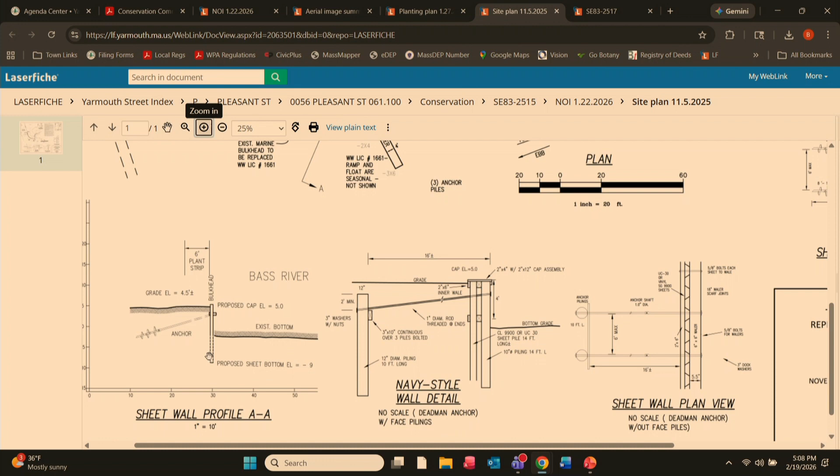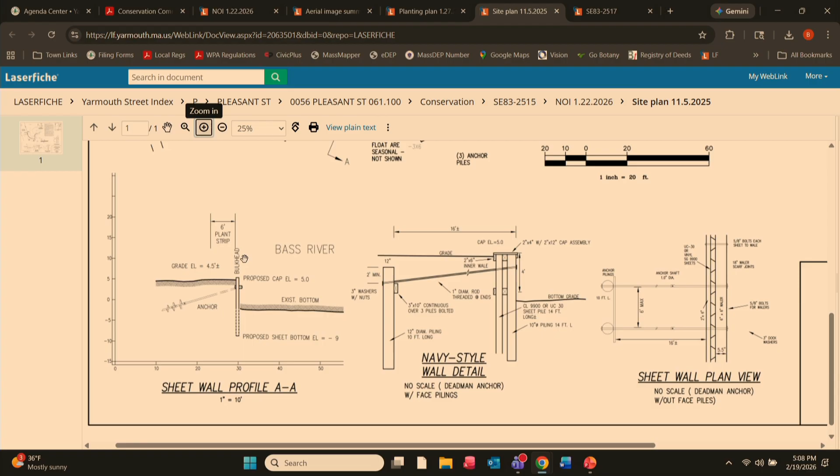Very traditional approach: the old material would be removed from the site completely. When these things are done, they basically pull back the material and extract the old materials in segments, so effectively what you have at that point, for a very temporary period, is a beach. The new materials go in, get fixed in place, bolted, and the fill goes in as we go, with the final amount of fill at the end.

The planting is beach grass with a smattering of Virginia rose or Carolina rose. I know I had Virginia on here, but the preferences are quite similar, and they're both considered native.

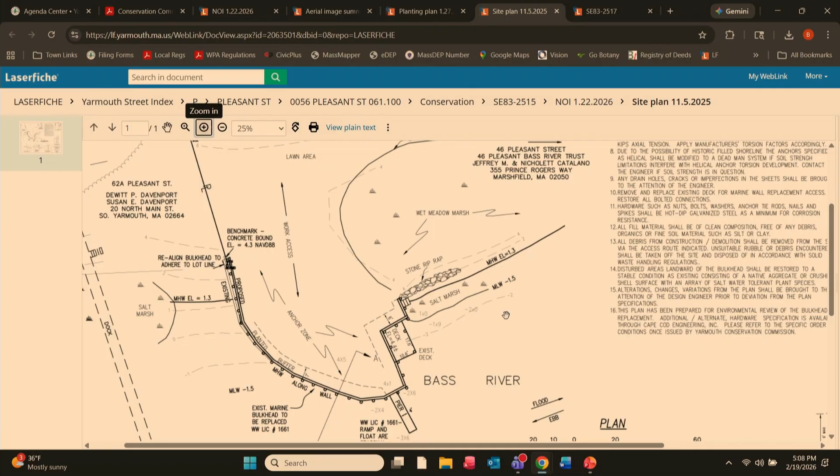The grass area for access is a turf lawn, so I could imagine that would be dented if it's not matted, and that would just be top dressed with topsoil and reseeded. I don't know, they might resod it, but I don't think there'd be any need to do that.

I don't recall whether we had anything serious from DMF. I don't think we had much feedback except that they received the project. It's at the boundary of the tide boundary here.

So I'd say this job might take 2 weeks by a good marine crew, and no surprises that I could see ahead, but I'd be happy to answer your questions. Thank you.

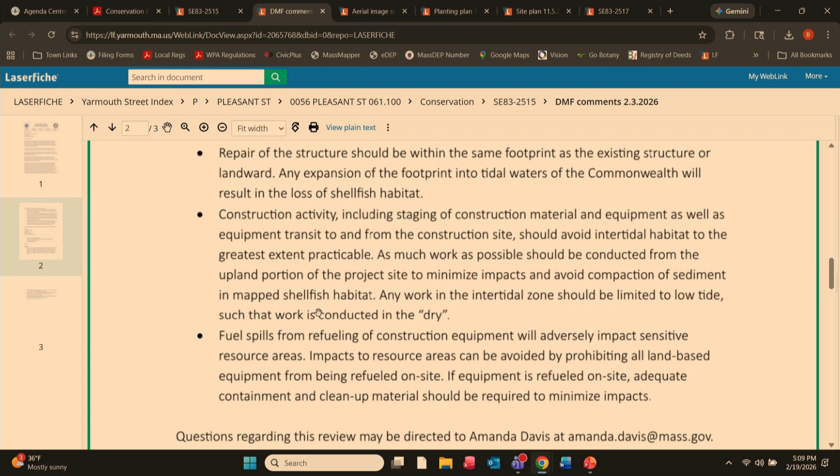Anybody have any questions? Whitney? No, you addressed all my concerns prior.

DMF is just going to limit any intertidal zone work to low tide, 2 hours on either side of low tide, and no refueling, no time of year restriction or anything else. Thank you. You say no time of year restriction? I didn't see one either, okay. Thank you, that works. I don't think anyone will be there in the summer, though.

You never know, though. Anybody in the audience have questions or comments? Anybody online? Raise your hand. Don't see anybody.

Can I hear a motion to accept this notice of intent? So moved. So moved. Anybody second? I'll second it. All in favor? Aye. Anybody opposed? Okay.

Well, thank you. It was straightforward, and we appreciate your attention to it. Thank you. See you soon.

The next is a notice of intent for SE 83-2520, Cape Cod Engineering for Bass River Property LLC, 222 Pleasant Street, proposed reconstruction and raising of an existing pier on coastal beach, land under the ocean, land containing shellfish, salt marsh, and land subject to coastal flooding.

They're asking for a continuance because the meeting for what was the meeting that was canceled? Yeah, the Waterways and Shellfish Advisory Board meeting was canceled. Right, so they didn't meet ahead of time, so we're going to wait for them to meet before they bring it back. So we want to continue to what date? To March 19th. March 19th. So can I hear a...

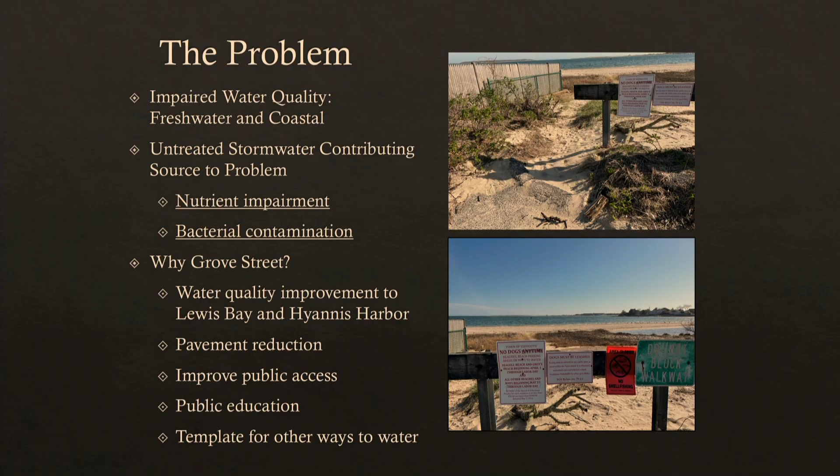So again, the short-term goals were to identify locations around the town for improvement, and with the funding, take those first 5 through design and permitting. As Nate indicated, we've also gotten funding from the State Office of Coastal Zone Management, as well as USDA Natural Resource Conservation Service, to complete construction for the first 2 sites in the last year.

Again, trying to improve water quality, reduce shellfish bed closures, and for an upcoming site, one that's also by a beach, reduce any impacts to beach closures and cyanobacteria blooms in Long Pond.

So this is the high-level summary of timeline. Again, 2023, that inventory of sites. You can see in 2024 kind of the top 5 sites under that first list, which included Grove Street.

We were able to advance the Curve Hill and Standish Way all the way through construction through last year. And right now we're working on the permitting for Grove Street and applying, right now working on application of funding to get that constructed, hopefully this fall or into early next year.

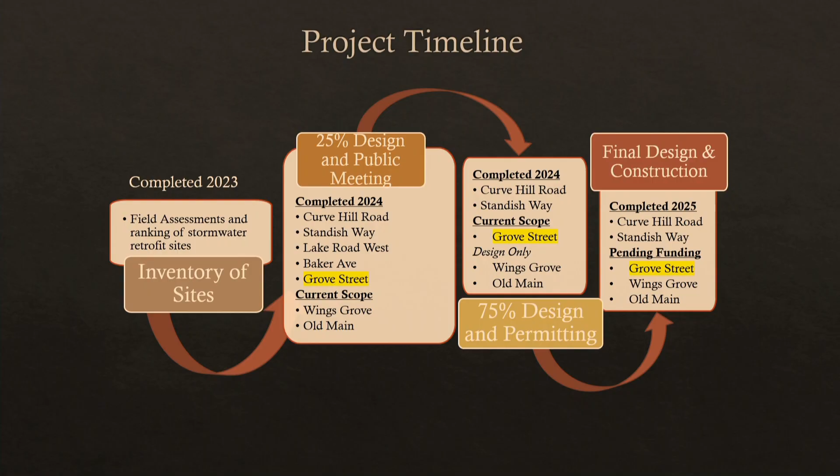And we have a couple other sites, Wings Grove Beach, which is on Long Pond, and along Old Main Street where the sewer work was just completed, which is also a priority site that we're working on design right now. So I'll let Horsley Witten go through the details and also show you on a map where all those sites are.

Good evening. My name's Janelle Very. I'm the project designer with Horsley Witten Group.

Okay, so I'll be going through the design of the project, and my colleague Amy Ball is our senior ecologist who will be going through the resource area impacts.

Just a little agenda: we have our project goals, our existing conditions and resource areas, moving to proposed conditions, and the resource area impacts.

So as Nate and April both mentioned, our goal for this project is to improve water quality and reduce pollutants, particularly bacteria and nitrogen from the stormwater. For this project specifically, we are looking at capturing and treating the water that's running down Grove Street before it discharges out into the Hyannis Inner Harbor and Lewis Bay.

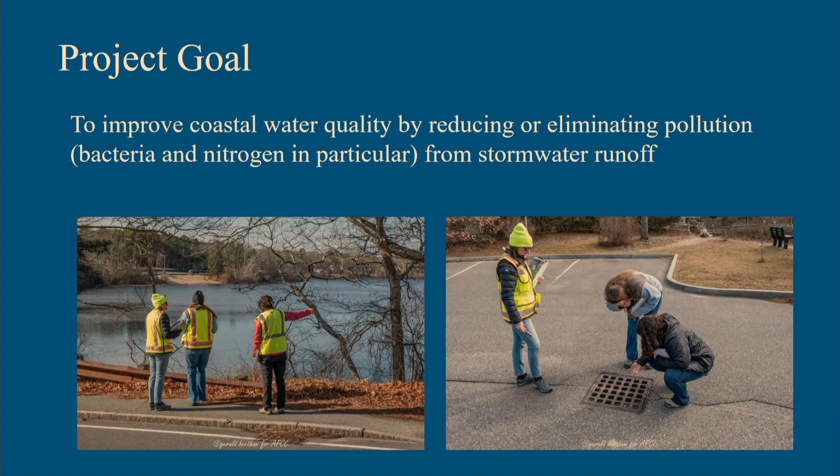And this sort of just gives a visual of what Nate and April were both talking about. Maybe next slide? Yeah, okay.

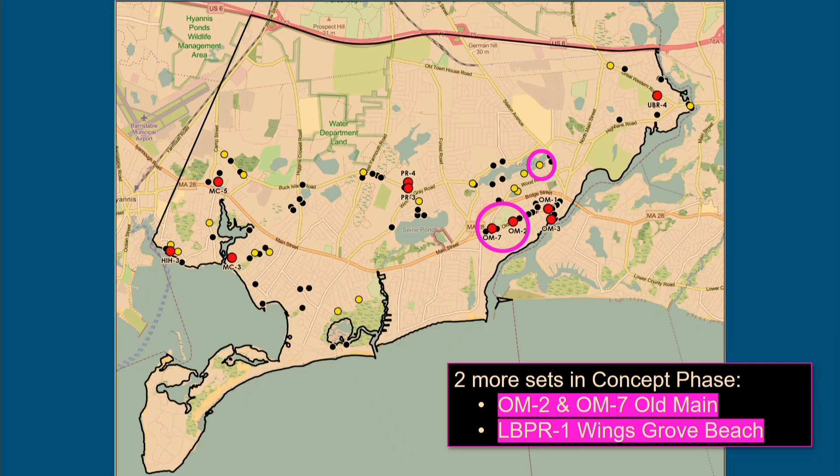Hi, good evening. For the record, Amy Ball, Horsley Witten Group. So I'll kind of tag team with you on this one, I guess. I jumped in. But go ahead.

So Grove Street is a town road. It's a public way to water. Both sides of the road are residential properties. The road is relatively steep with about a 6% slope sloping down to the beach. If you go out there, in this photo you can see there's some evidence of sediment and debris accumulation at the end of the road, and then some erosion just past the road. There are records of an existing leaching basin just beyond the pavement. We were not able to locate that in survey, but we have plans for that.

And I guess a few other features are the split rail fences on both sides of the road and a timber guardrail at the end.

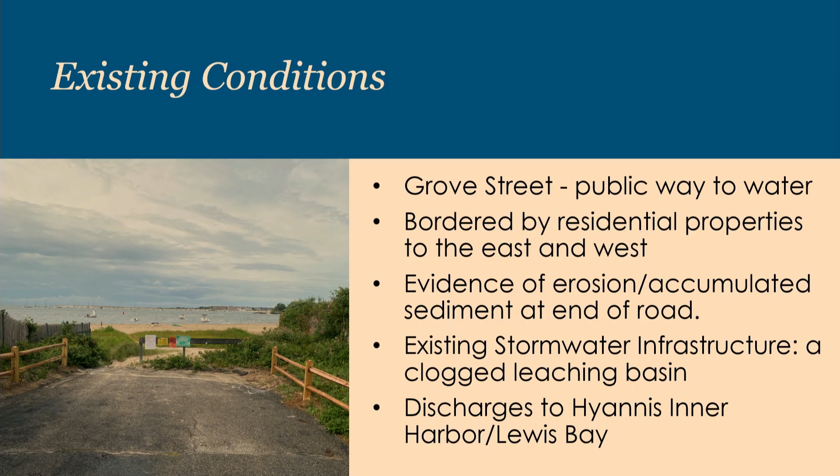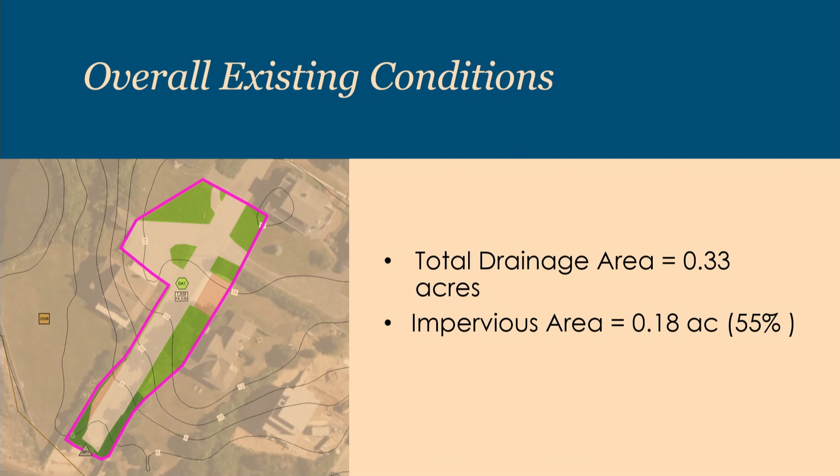So the drainage area is pretty simple for this one. It consists of Grove Street south of Park Avenue and some of the adjacent driveways and front yards. And it's about 55% impervious. And now I'll hand it over to Amy.

Sorry, got ahead of myself. So there are a lot of overlapping resource areas at the site, primarily because of the coastal features. So just at the bottom of the slide there, you can see with an arrow, because it's a little further down, the Hyannis Inner Harbor and Lewis Bay. It is separated there by a perennial stream and then a swath of salt marsh that is then separated by an area of coastal beach. And then landward of that, we have an area of coastal dune before you hit the end of the street.

And so, of course, we have a lot of overlapping resources. The buffer zone shown here is the one to the most landward resource, which is the coastal dune. So you've got the 35, the 50, and the 100-foot buffer zone.

You have the riverfront area associated with the coastal streams. So the blue line there is the inner riverfront area, so the inner 100 feet. The 200-foot riverfront area extends further up Grove Street.

And then we also have the coastal flood zone, so both a velocity zone, which is in the red, and then the purple area here, which is our AE flood zone, which is elevation 11. Next slide.

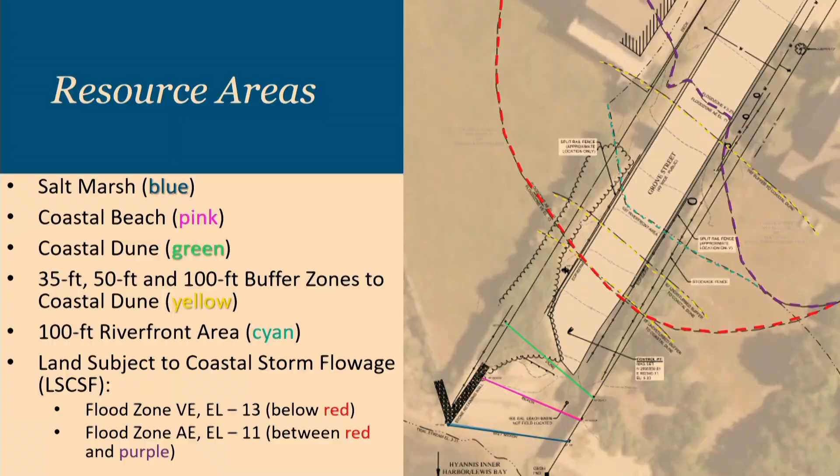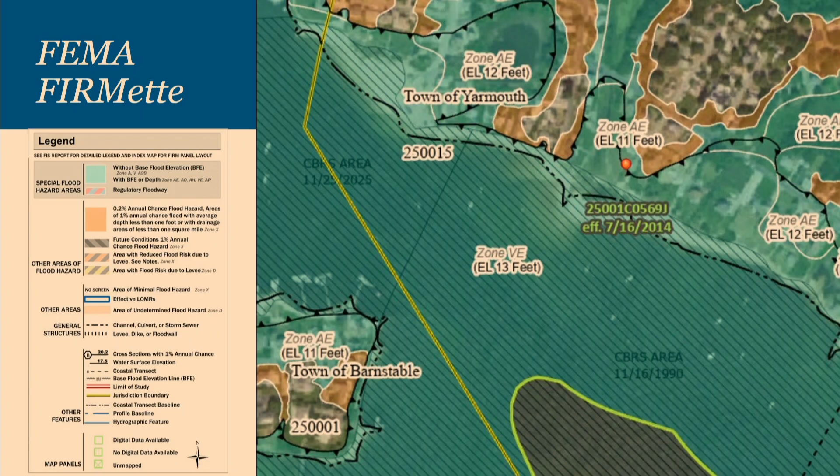And I want to highlight this a little bit more. When we first looked at this site, we realized we had both a velocity zone and an AE zone, and that had some design implications for the project, specifically because of that energy from the velocity zone.

I'll now go through the proposed drainage design. So our aim of the project here was to pull back and remove as much pavement as we could, and in that footprint add a bioretention area.

So we have the drainage area DA1A, which is our drainage area that's draining to our proposed bioretention area, and then we have a small portion of the site that we could not capture with the bio, but it doesn't include any impervious area.

So how we approach this is pulling back the pavement as far as we could, leaving space for a proposed driveway at this property here. So we looked at just leaving the pavement of 5 feet or so after that, and then removing the rest of the pavement and including the bioretention area.

Because of this sort of space limitation, we are able to treat just under the 1-inch water quality volume storm, about 93% of it.

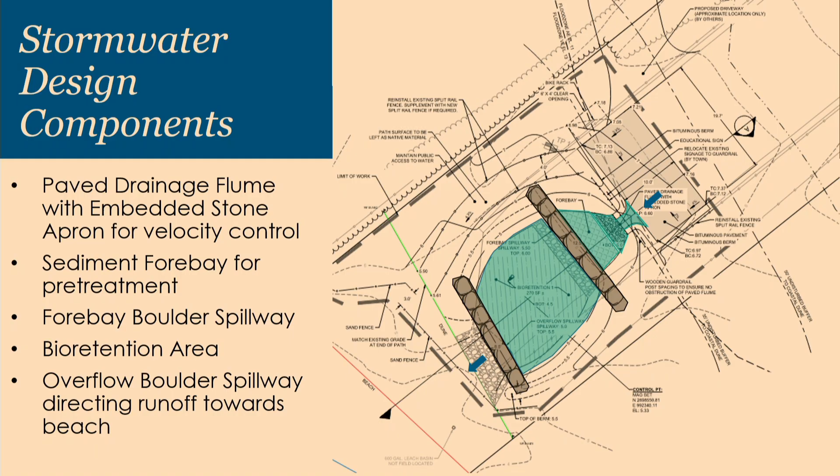This is just a visual graphic to kind of visualize what this would look like. So we have the bioretention areas within the footprint of the existing pavement that is out there now, and we've included maintaining access to this beach.

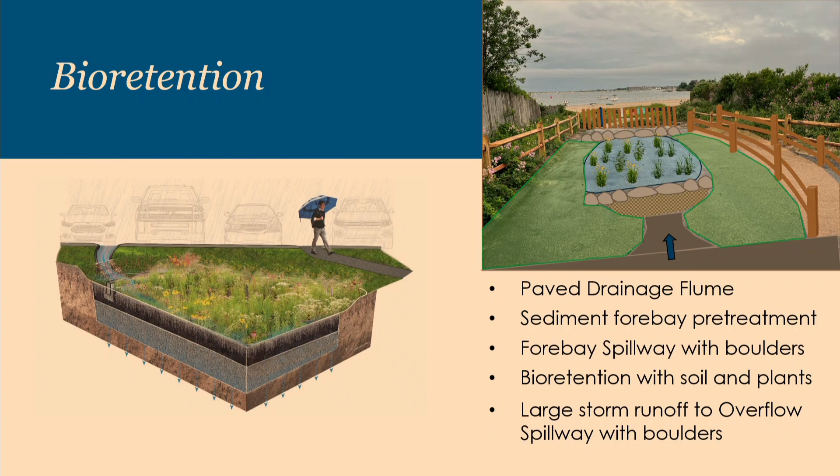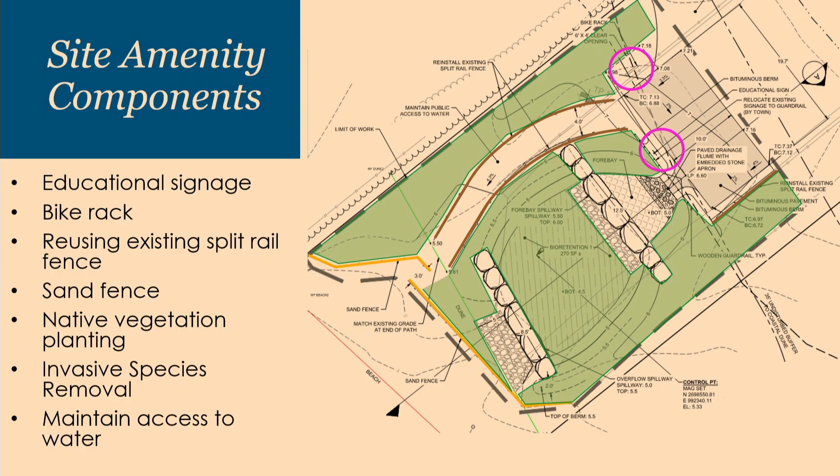With that, these are a few of the other site components. On the site, we have included proposing a bike rack at the end of the road, an educational sign. We have demarcated a path to the beach reusing that existing split rail fence that is out there now, and some sand fence at the end of the site to act as a barrier. We do have some invasive species removal, and we'll be planting some native coastal salt-tolerant plants. The site actually occurs within many of the resource areas that are out there, including the velocity zone and

the 50 and 35-foot buffer zone to the coastal dune. There's a small amount of work within the coastal dune, but that's limited to removal of the invasive species - I believe we have multiflora rose and bittersweet out there - and then replanting with beach grass, and if we can get them, a couple of low-growing shrubs like bearberry and Hudsonia, the beach heather. Otherwise, the entire limit of work is about 1,900 square feet.

It looks bigger than that, but this is a 5-scale plan, so it covers just the very end of the road there. As Janelle may have mentioned, we're removing about 800 square feet of existing pavement. There is an area of pavement that will get removed and then replaced as part of the design, just because we needed to make the grading work. We'll be pulling things in, reusing those existing split rail fences there to try and allow for beach access, but also to make sure that folks are being trafficked around the resource areas and away from the bioretention area.

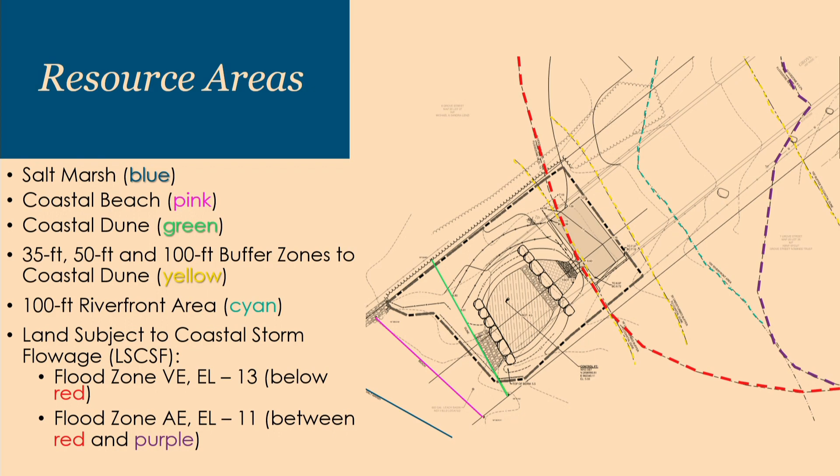So I just covered that. Thanks. So one of the things we wanted to make sure was important because of the velocity zone for this stormwater practice, was to maintain a really low profile. The boulders stand out on plan view, but if you see the profile, they're actually buried mostly underneath and are just acting as a spillway for the water as it flows through the system.

This is a design change that we made recently from granite curbing with a weir in it, to make sure that there were going to be no potential structures that would be acting as potential projectiles in a large storm.

And then, as Janelle mentioned, we are putting a lot of native plantings in. This looked better on the screen than it does now, but a couple of trees, the junipers, and a handful of beach plum, as well as some bayberry and a black cherry. And then all of the ground cover is a mix of herbaceous and grass species that are all salt tolerant and native.

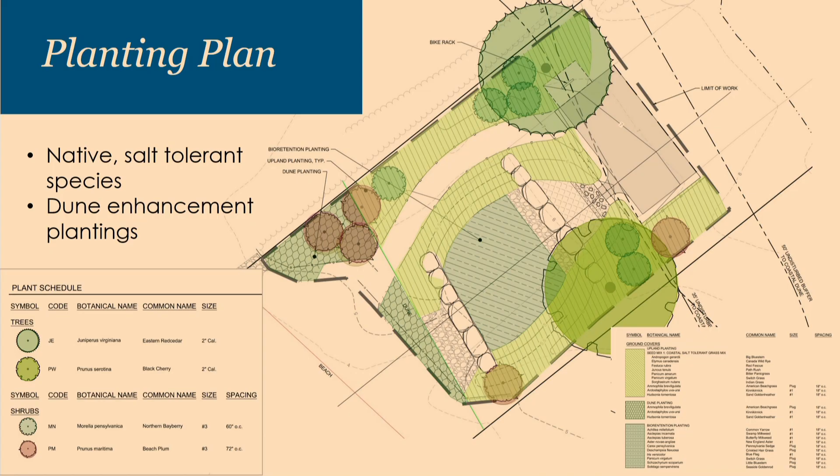The intent here for this project has been to improve existing conditions, treating previously untreated runoff as it comes down Grove Street before it enters the beach and all of the resource areas, including salt marsh, and is meant to be restorative in nature and provide an overriding public benefit and environmental benefit.

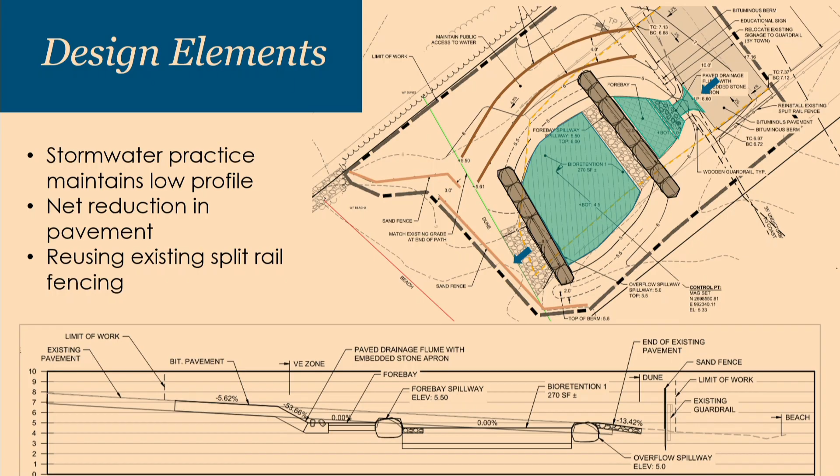Is that where this thing, or is it off to one side, or? It's in the middle, yes. So it'd be pulling the pavement back about 800 square feet and putting a bioretention area where the pavement was.

Okay. And also, it's a town way to water, but there'll still be an opportunity for people to walk down there or whatever. There'll be a pathway or something like that. Yes, we have sort of just a sand pathway going down, and that's why we have the fence on either side, to kind of demarcate where the path is and keep a barrier to the plants. Okay. All right. Thank you very much.

Yes, the barrier along the path, that was split rail fence, you said? Or was that going to be? Yes. So it'll be this split rail fence, and that photo has recently been installed out there, so we'd be looking at reusing that same fence.

Okay, so then what is the purpose of the sand fence? You said it was to act as a barrier, but I'm not understanding to what. It's meant to sort of act as a sand fence for the dune, to protect the dune, which will be replanted after we take out some invasive species, and help the dune stay established while the beach grass grows in, and also to keep people off the dune.

Okay. Yeah, so this dark brown will be the split rail, and these ones are the proposed sand fence that will run along the dune to keep people from cutting straight through the dune, so they go around. Does that make sense? Not particularly. They don't... want to create a channel for the water to go.

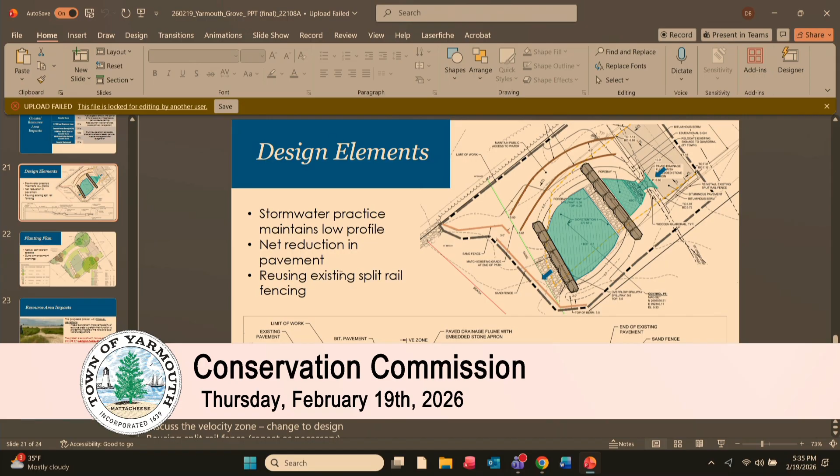Yeah, I understand that. And since they're putting vegetation, they also want to keep all the people away from all the vegetation, so they're trying to guide pedestrian traffic as much as possible. While the sand fence can also help the sediment accumulation on the dune over time.

Understood. You have a problem with the sand fence? I don't quite see the purpose of the sand fence. I understand the physical barrier to the dune and the plantings, but you said for storm velocity it was to keep a low profile, and this is the highest profile of the project, so just thinking storm purposes, is the intent to slow the velocity of the water before it gets to the detention basin?

You can take away most of this, but sand fences are proven to help sediment accumulation in the summer months for dunes. We're trying, with our velocity zone regulations, to eliminate structures, but sand fences do have an intended purpose to improve the dune over time. I don't think I would look at it with the same level of scrutiny as a wall or a fence. It does have openings in the slats, and it shouldn't be an impediment to coastal storm flowage, but it's meant to help the dune.

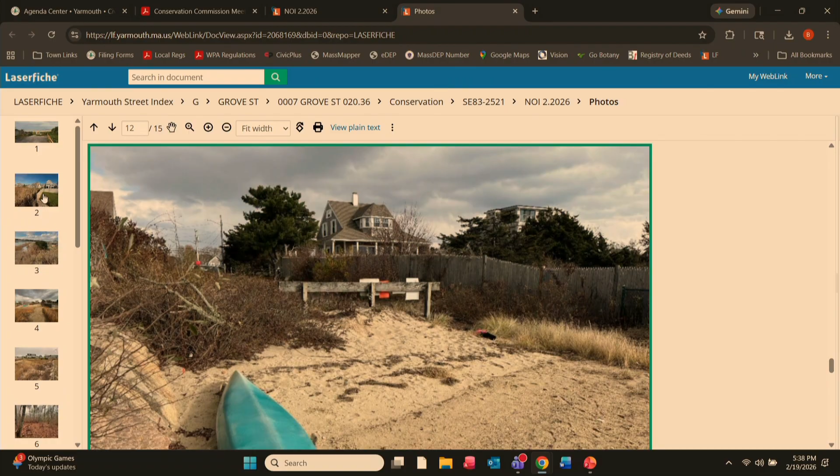Brittany, if you show that last picture - the one that looks toward the water. I'm not a Yarmouth resident, so I don't know the answer to how much foot traffic is there. But you can see there's an existing pathway, and it appears that it also accesses that tidal creek, which created the riverfront area. And in one of the pictures there's a kayak or canoe, so it's possible folks are using it for that purpose.

That's fine. These kinds of projects, one of the concerns, of course, is how you keep them safe from any kind of damage. I just don't know if anybody ever did any collection of information regarding how much it's used, and would that be a factor in terms of how you built it?

I don't know. There is currently a townway to water study going on with Horsley Witten's group. I'm not involved with it - it's under Natural Resources, so I also don't know a lot about it. But they're in the final stages, I think, of compiling that information. They did a couple of public meetings and surveys, and they are compiling action items to improve certain townways to water. I was just wondering how much that area is used by folks.

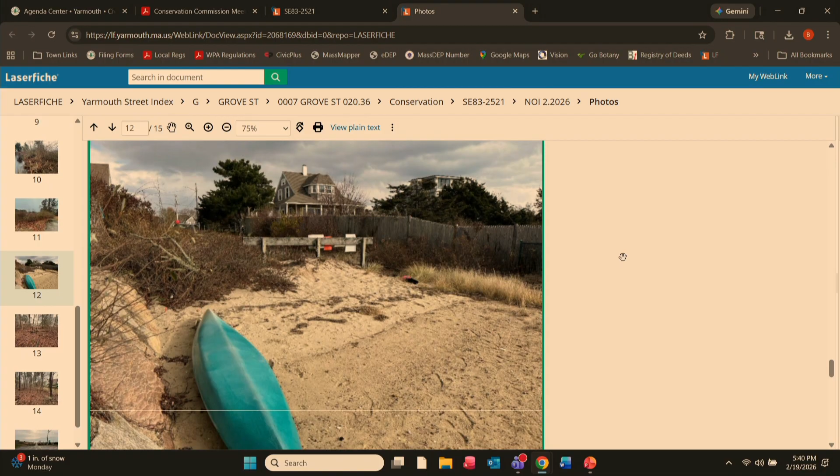Yeah, just to add that Dave from DNR did review the plan as well. I did have an intern a couple summers ago do counts, but I don't have that information readily accessible. But given the fact that it's within that existing pavement footprint and we're maintaining the paths, the change of use would be the same, because it's just pulling. And believe me, I totally support this project, so I'm just kind of interested in it.

Okay, thank you. I have a couple of questions. Leave that picture up if you would. Obviously, people must park there. Now you're taking away that parking, correct?

Where that picture is - I said, obviously, today people would park their cars right at the end there. That won't exist. It'll just be further up the road.

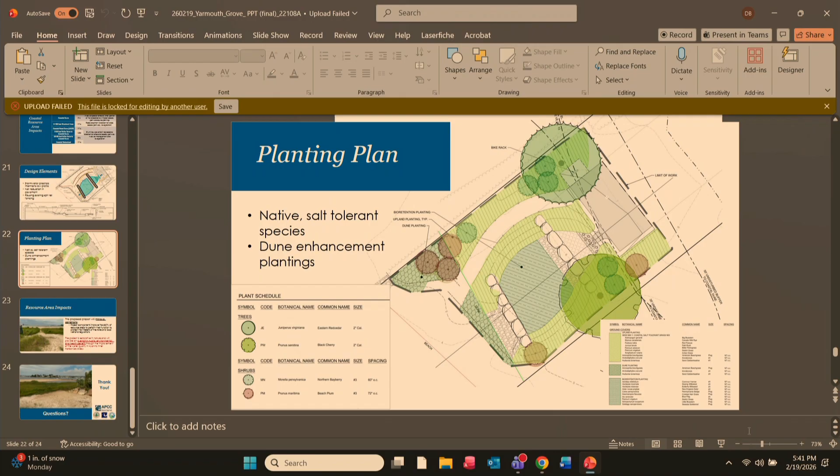Okay, but will that be pervious material that they'll be parking on? I would say they won't be able to park there because of that proposed driveway - potentially the proposed driveway. There's not enough pavement after that driveway for two cars.

Yeah, that's something we have discussed, but I don't believe many people park down there currently, so we didn't see that as a main factor to maintain that parking area.

I don't think you have any control over this, but I assume some of the driveways that water runs off are impervious. I know you probably can't order people to change this, but have you talked to the neighbors about what we're doing to improve water quality, and could you consider asking them to put in pervious driveways? I think that would be helpful. I'd hate to see all this work go to naught.

They would need to come in front of this commission to change their driveway, and then we would be able to advocate for that. I don't know if they'd have to come to us to change from impervious to pervious.

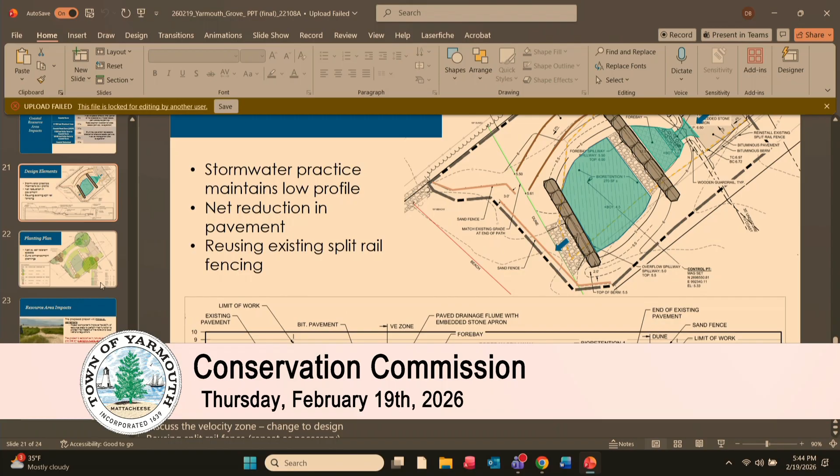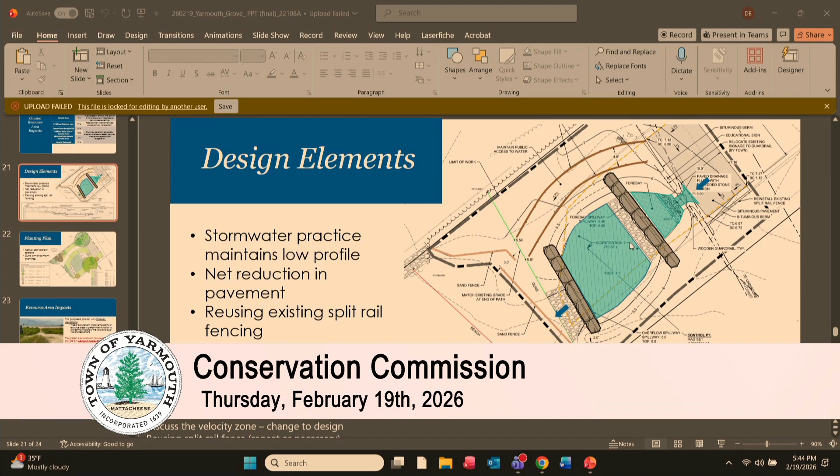Dave, go ahead. Well, having rented homes on that street 10, 20 years ago, I think it's mostly small families that walk their kids down there, and once in a while cars, but there are other beaches nearby with more car availability, so it's a little tough to turn around. Safety-wise, I think it's a reasonable kind of construction that will be able to handle the flow.

I wasn't talking about cars, I was talking about kayaks on the beach. Well, kayaks on the beach were not as popular 20 years ago, but they are now, and it's a constant problem we have, whether people leave it on what they call their private beach and throw it on the sand dune or whatever. I know that's just me venting, but it is a problem.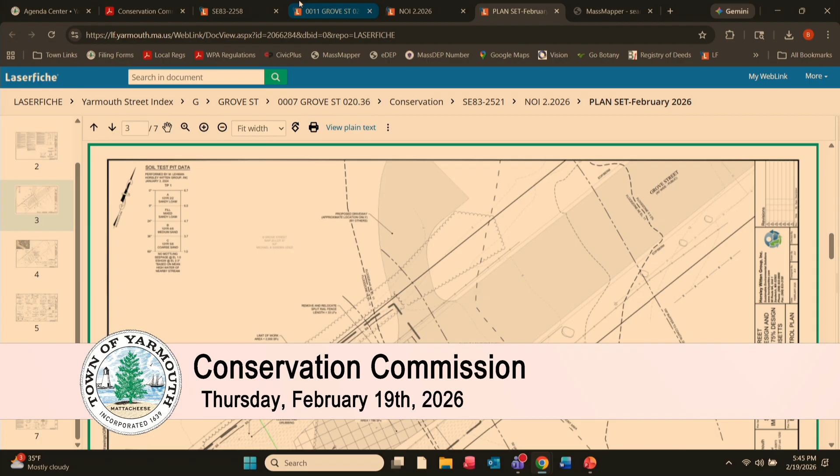Isn't this something that maybe the study being done, which has been in the offing for a couple of years, could address? Maybe Natural Resources has to address how that town-way to water is used, because if you've got this great system at the bottom of Grove Street doing such important work, you wouldn't want it jeopardized by people putting kayaks in different places and so on.

I don't know any place where you can just put a kayak on town property and leave it there. Maybe there are places you can get a permit to do that. Bass Hole has a permit for that. But there are a lot of places I walk in my neighborhood where people just dump them, on public and private property. Private's a different story, but not if it's on the dune. There are regulations having to do with storage of kayaks on dunes that would be addressed by this committee.

If I have a kayak and I walk down Grove Street, leave it by this place and leave it on the beach, I wouldn't expect my kayak to be there the next day, to tell you the truth.

I think it's something Natural Resources, the enforcement branch, can address, to do this assessment. Also, I think it would be really wise for people along the way, if they can do it, to transform their driveways from impervious to pervious. That would take time and money, but it shouldn't impede the forward movement of this particular project, for sure.

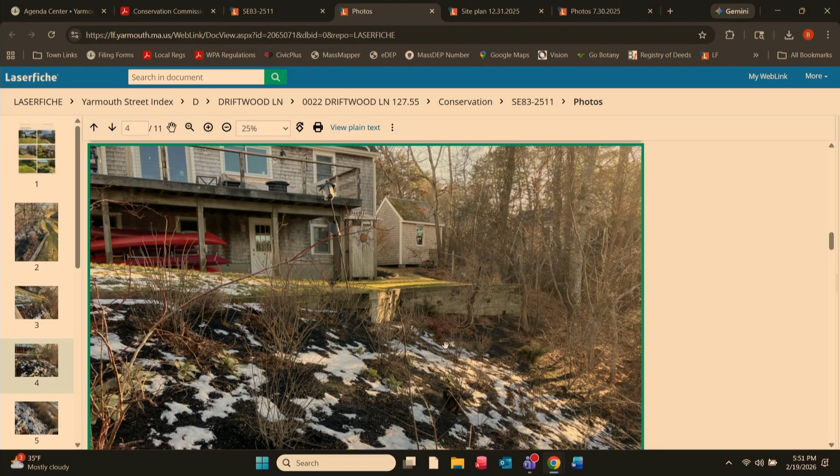To protect the resources, we've proposed a silt fence with straw wattles to reduce the amount of construction disturbance. We'll be putting up the DEP sign once the project is approved. We'll be working in about 20-foot sections, removing a 20-foot section, replacing about a 20-foot section, and then moving on so there's not a large area that's destabilized and exposed.

So with that, we really feel it's a fairly straightforward project. If you've been to the site, I don't know if you saw photos, but you can see there. It's probably fairly covered over with snow right now, but the wall in the backyard—I have a blow-up of it right here. So we will be replacing the wall.

There's a small portion of it underneath the existing landing, which we'll have to get disassembled to take out the old wall, and we'll be proposing a wall right up to that landing. We've shown the proposed fence in the backyard with a gate, as well as the work limit that goes all the way around to reduce temporary construction impacts.

I've shown a typical section up here. So we've gone with 8 by 6 inch timber ties with a top elevation of 22.5. We think the highest point of the wall is about 3.5 feet high. And we've shown a gravel bedding with some filter fabric around it, just to provide a little drainage behind the wall, to kind of slow the rot of the wall and keep it a bit drier during storm events. We've also shown some dead men to beef up the strength and rigidity of the wall.

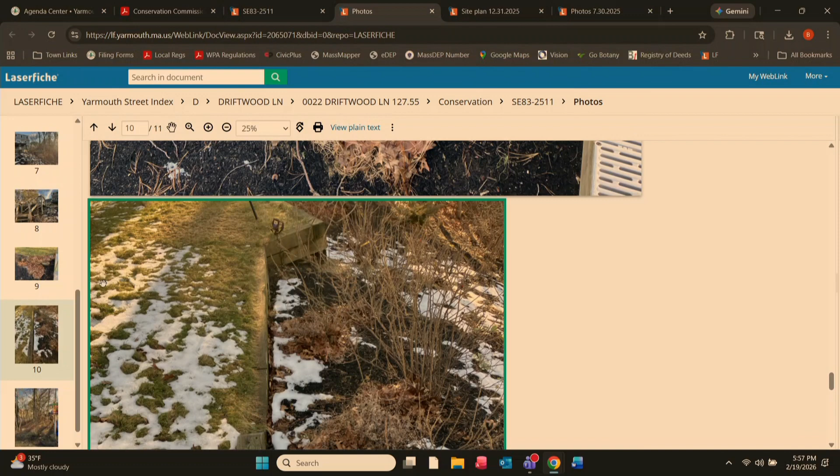I'm happy to see that you're going to straighten the wall out. Whatever. Yeah, it was not in the original proposed house plan, but obviously a wall is needed. So, you know, back in the 70s or at that point, I find that a lot of topography and walls and grading were really not always thought about, and it's something you really need to be considering now with any sort of house design or wall design or anything like that.

Anybody have any questions?

No, more just a comment. For the mix of ground cover, I feel like I'm channeling Ed, but maybe not creeping juniper. The Barnstable Conservation hates it. I've worked with Ed for years. He left us with that message when he left - he said no creeping juniper. I know not to bring it in front of Barnstable, so I'll make a mental note not to bring it in front of Yarmouth anymore either. He's left his mark. I have that written down here too. Just letting you know, that was my only comment.

Anybody else? So it sounds like we need to continue. I have a couple more comments, if that's okay. I'm just going to get to that. Okay, so after we finish, we're not going to be able to vote today, but sounds like we need to continue. Go ahead, Brittany. Just a minor plan note.

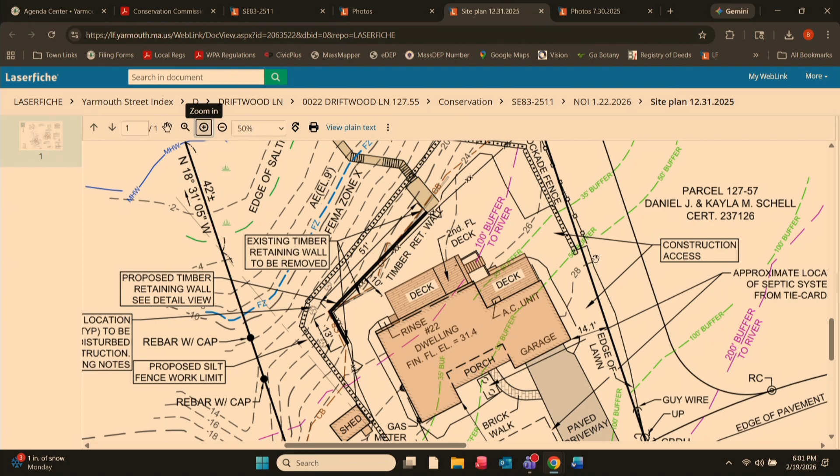And then if we wanted, we could probably incorporate a dry well into the corner of the house if we felt that was a net benefit to the environment. Are there any gutters and downspouts and dry wells existing, or does all the roof runoff go directly into the ground? Goes directly to the ground. Okay, so if you want, we can put a small dry well right there. Let me look at my design - we'd probably end up having to put it further up. Which corner is your rain barrel? Oh, on this corner there's a rain barrel, but on this side, yeah, we can. And that's the major side of the roof, but from the top it's not that much square footage.

I like the idea of a zero net fill. If we could scooch the wall to make that happen, just so that the coastal bank isn't impacted as much, I'm happy to do that. But it is not up to me. I agree, that's why I brought it up. Definitely do that, yeah.

Anything else? No, that's all. Thank you. Sorry, yeah, I lied. So you said these trees, you're trying to protect them. That's the goal, yes, the goal is to protect the trees. So I have a note on there - if they're to be removed, they'll be replaced, if during construction for some reason the roots got way underneath that wall. But I know they are on our side of the work limit, just because they are relatively close. But the goal is to leave them. Okay.

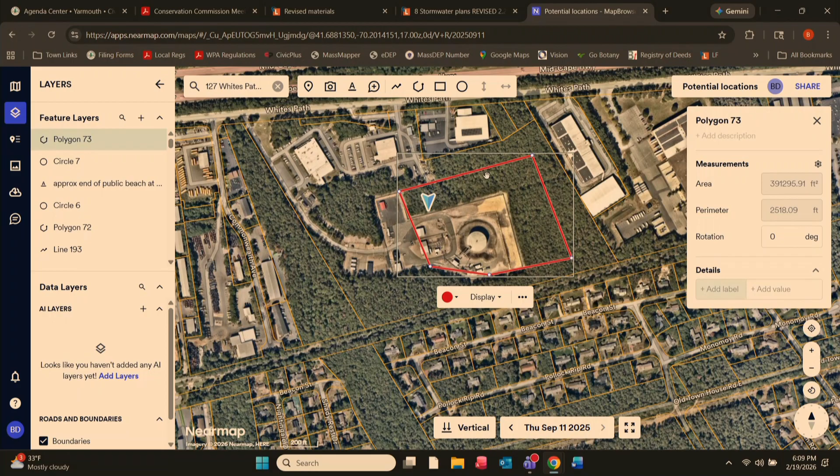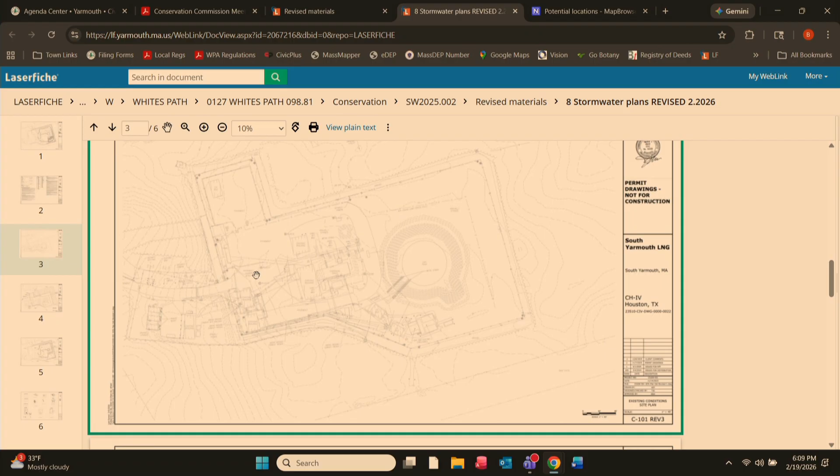Yeah, they are proposing... these are blurry. Since it's not within our wetlands jurisdiction, we cannot ask that of them. How would we ask them if they'd do us a favor? You could try, but that's just ridiculous, that's a big area. I mean, maybe there's nothing to do, but it is a big area, and that is why the stormwater management bylaw was triggered. So any area of disturbance, even if it's just tree clearing, that's over an acre, has to make sure the stormwater is managed, and they have met everything in our requirements.

And what's the surface of that? So they clear the whole area, then what's that surface going to be, because the tank is going to take up every bit of it. No, it's new infrastructure and a roadway that's taking up the new area that's cleared. The natural gas tank's not taking up a huge area.

Are you here for this? I'm the applicant. Oh, perfect, hi, come up.